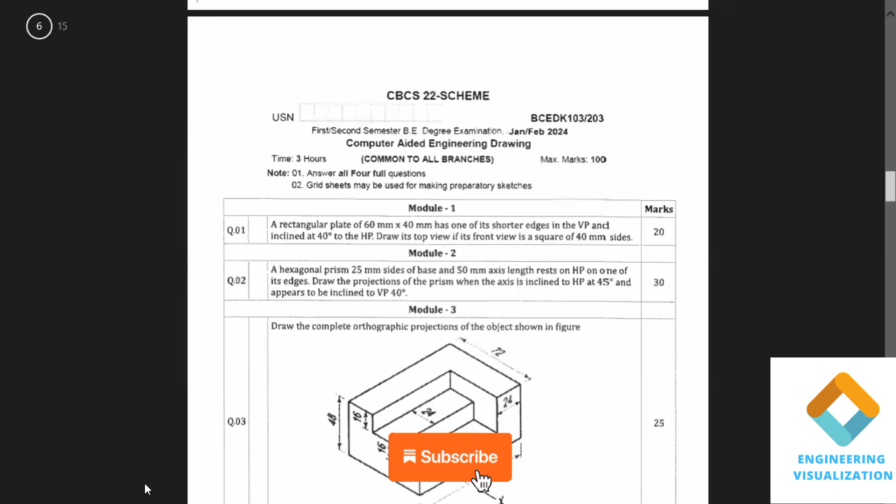Today we are going to solve model question paper 5, VTU computer aided engineering drawing. Question number 1 is rectangular lamina, question number 2 appears to be hexagonal prism, and question number 3 asks to complete the orthographic projection of this object. For this problem I have done the top, front and side views, so please go through. Problem number 4 is a cube problem, you can see this.

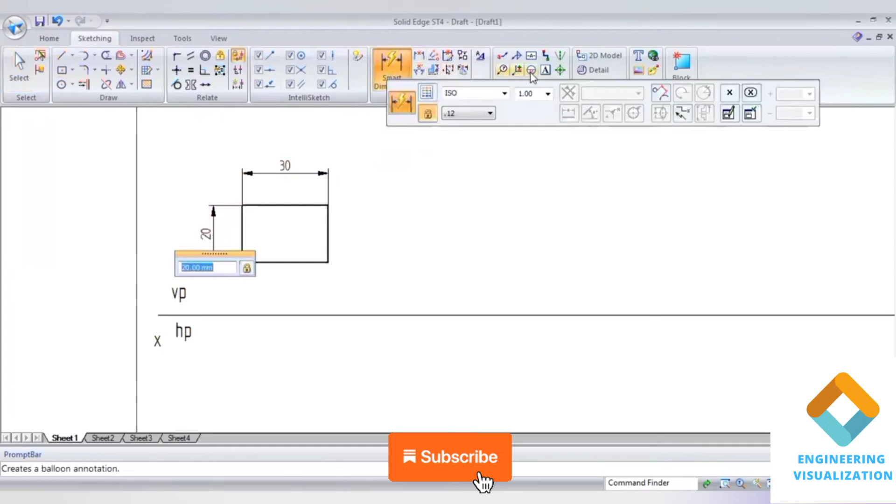Width given 30 and height 20, place it with the shorter edge here on the VP plane. Measure the dimensions, write down the notations and draw the projection lines to complete the top view.

Here B and C are not visible, that's why B and C are written within brackets.

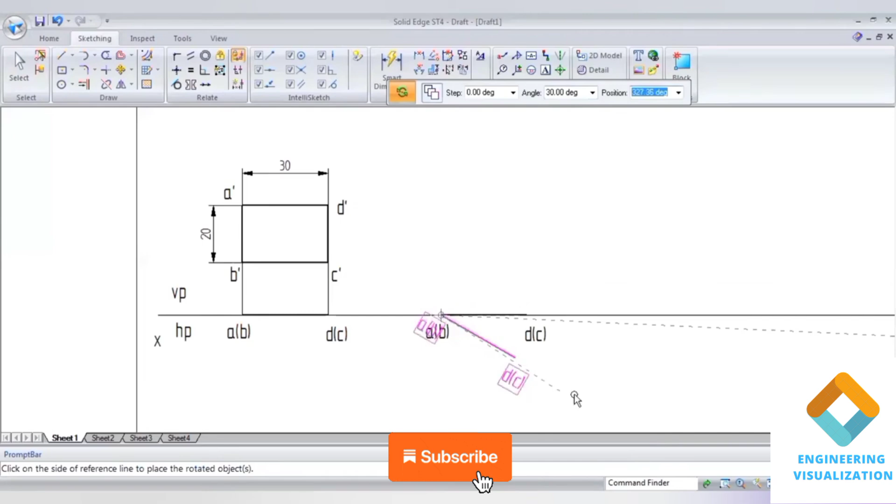Select the top view, go to move command, create a copy of it and slide along the line, and now we can give the inclinations. So inclination to the VP, here I'll give angle of inclination 30 degree. Inclination below the XY line means we have to give minus 30.

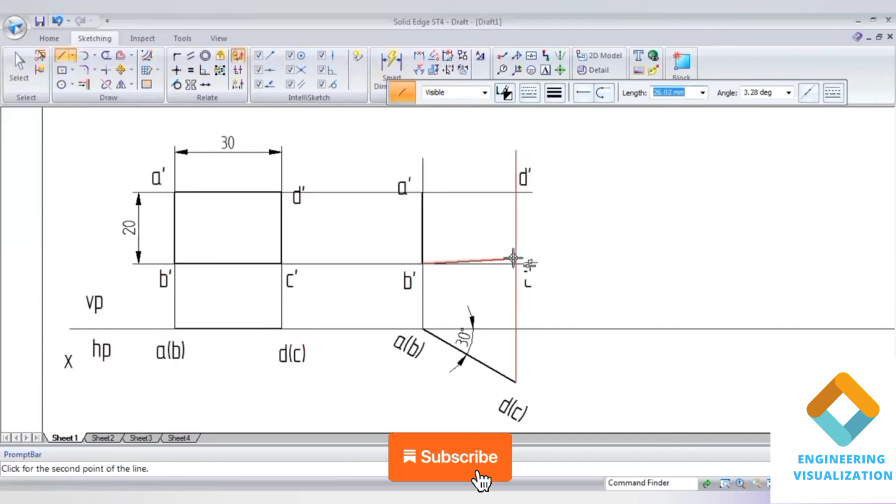Draw the projection lines to complete the second position front view, and write A dash, B dash, C dash and D dash. Go to thick line. Second position top view completed, and trim off these extra lines. You can see now the longer side of the plane is inclined at the given degree to VP, that means we should take that longer edge and give the angle of inclination here.

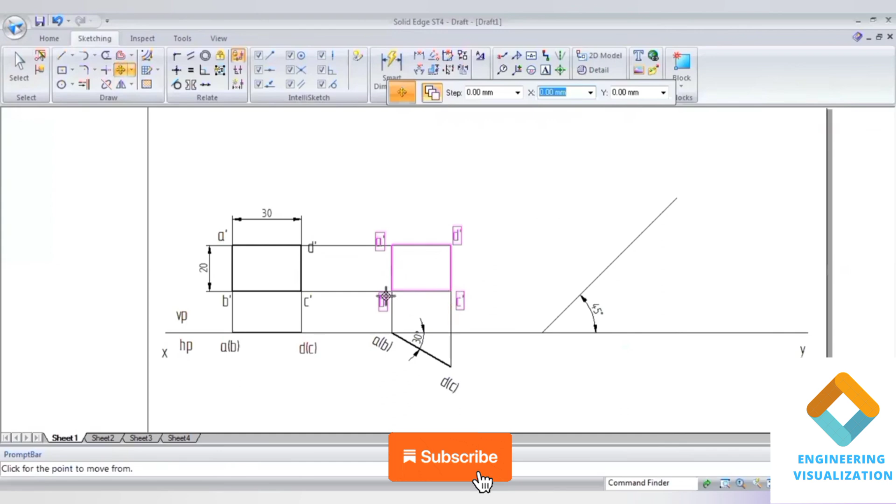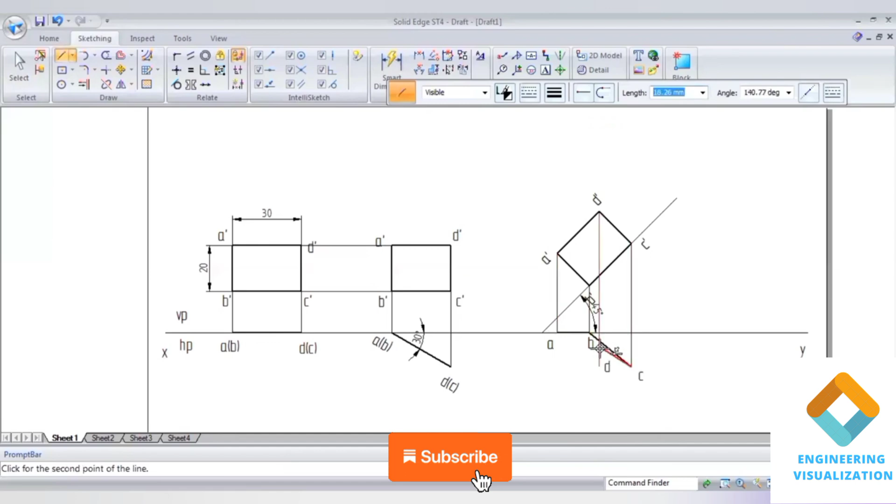First I'll draw an angle line, giving angle of inclination here 45 degree. I'll select this second position front view, create a copy of it and select the vertical edge here, B dash. Go to rotate, select this B dash to C dash and place it on the angle line. Then project downward to complete the final position, joining with the thick line. So this completes the problem.

Problem number 2, with respect to edge here: hexagon of dimension 25. Make sure this maintain relationship icon is on, then use polygon by center with 6 sides, with respect to edge. Give the naming C D E, given in bracket.

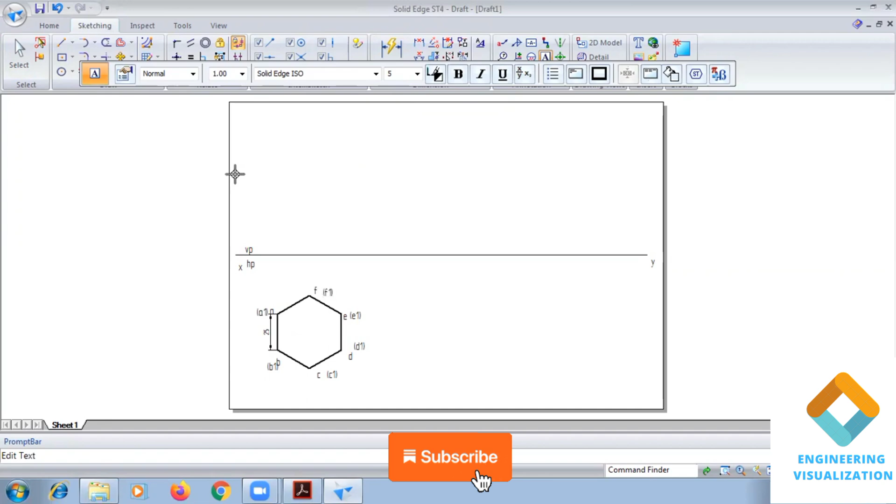After this, we draw thin lines to find out the center, that is the diagonals we are going to draw. It is O.

Now here axis length is 50, so we are able to see B dash, C dash, D dash in bracket.

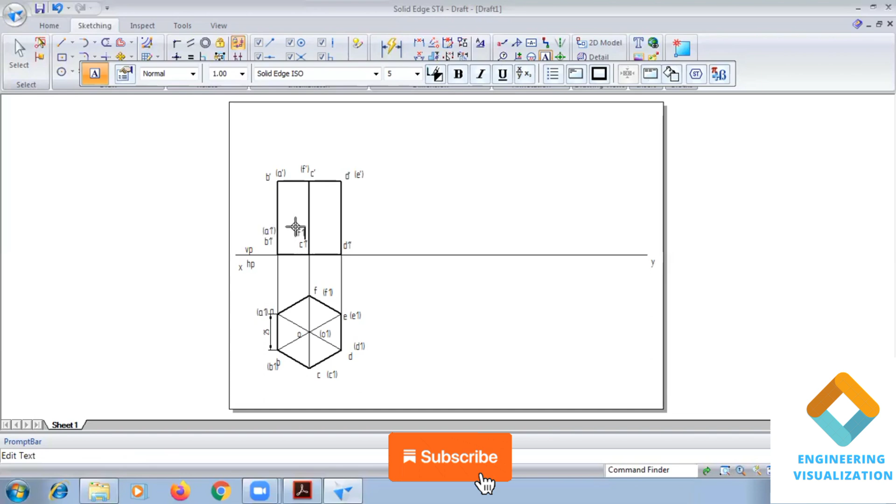Able to see O1 dash, and O dash also not visible. So now 45-degree inclination to HP.

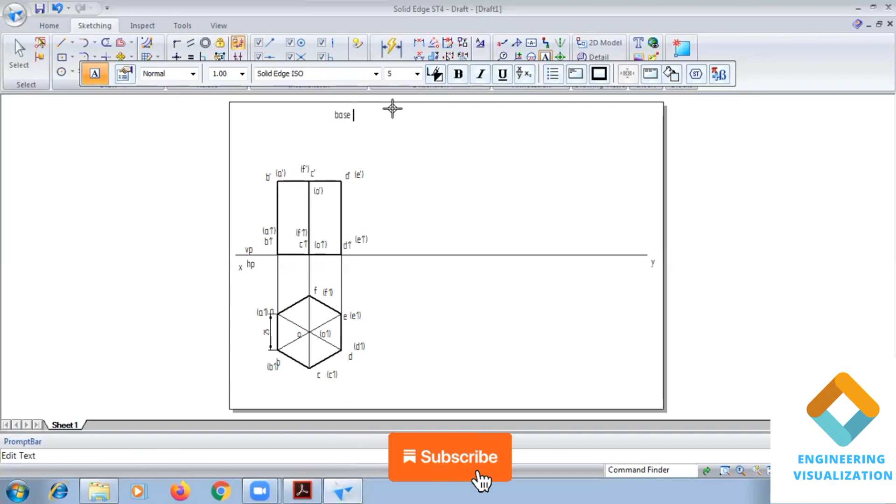So we are going for base edge inclination: 90 minus 45 equals 45. So we have to incline this with respect to the base edge, angle of 45 degree.

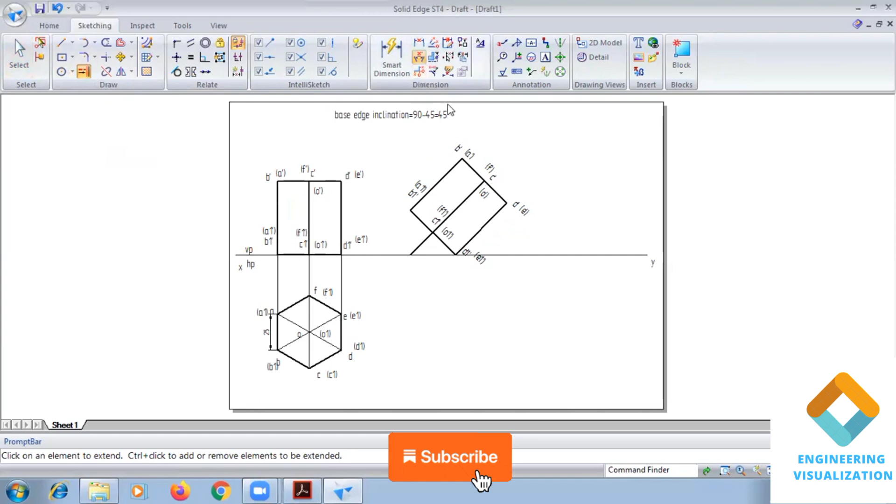Then extend command can extend the axis and find out the angle of inclination.

A1, E1, C1. So here, projection line.

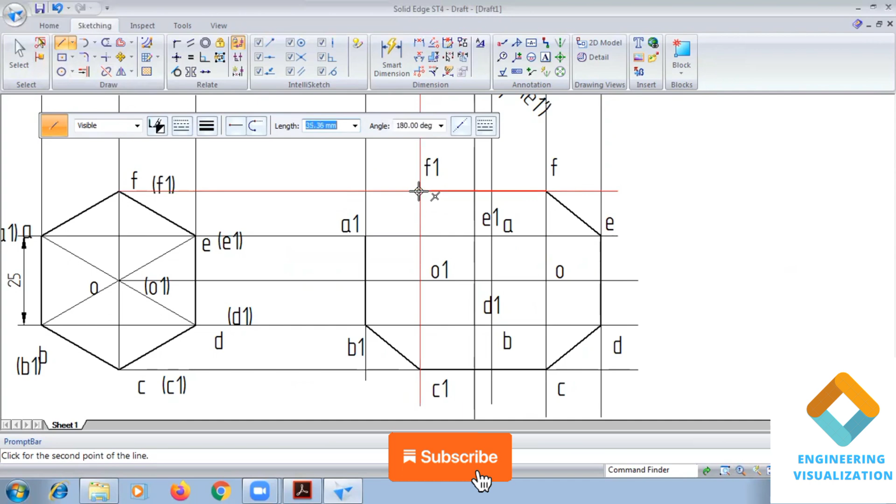This section of this is visible from here, and this rectangular face also visible. This hexagonal base is not visible from the top view, so it is written with the dashed line. Here from this slanted rectangular it's also not visible, you can show part of the line here from here to here.

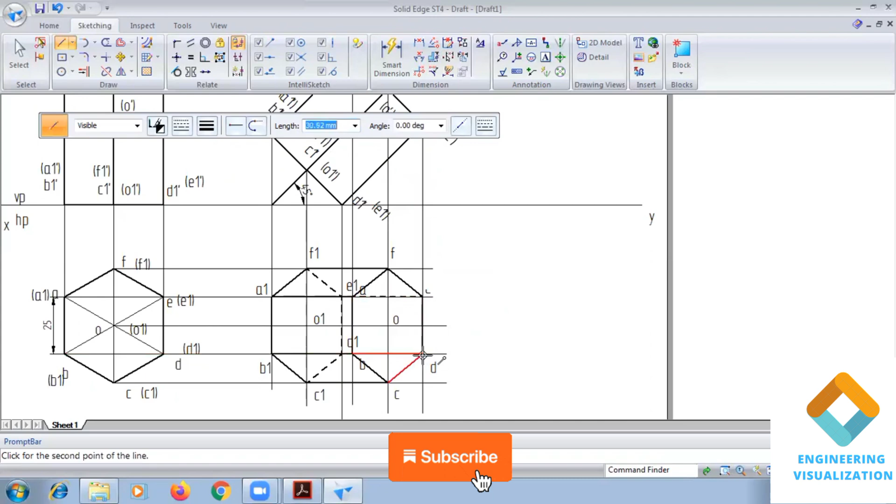Now 40-degree angle line. So angle we have to give, that is 40-degree angle, minus.

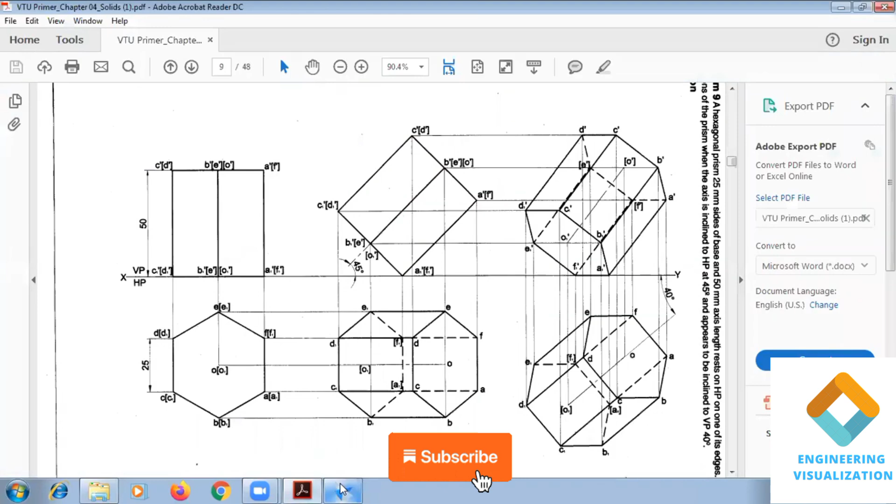You have to have here 40-degree, 40-degree, so this is 40.

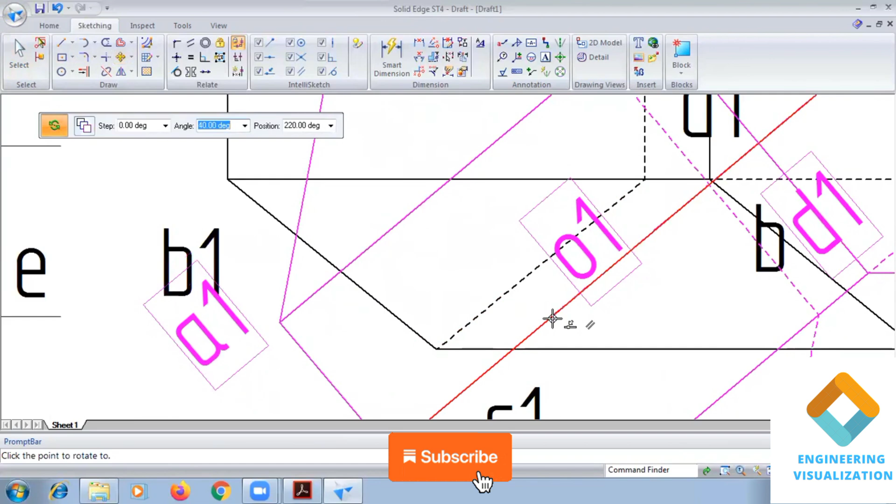Then we have to select it. Axis line here. So select this diagram to create it. So I can take it a little lower.

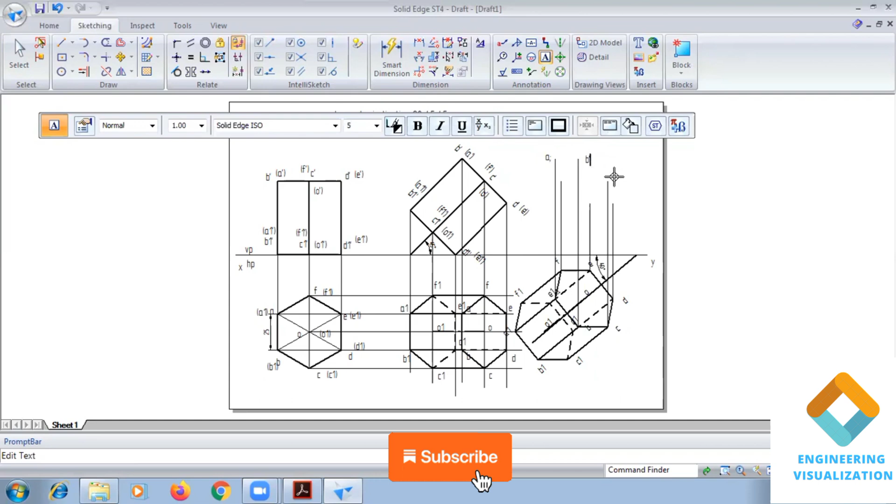Can give the naming, another projection line.

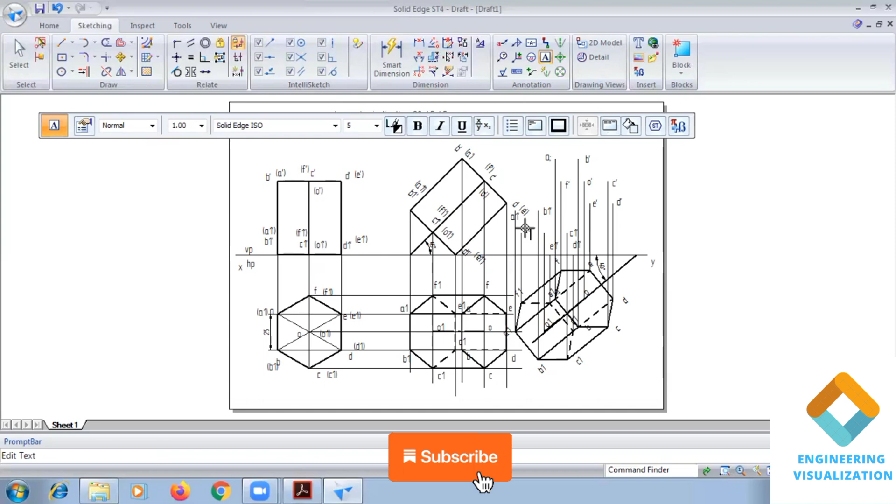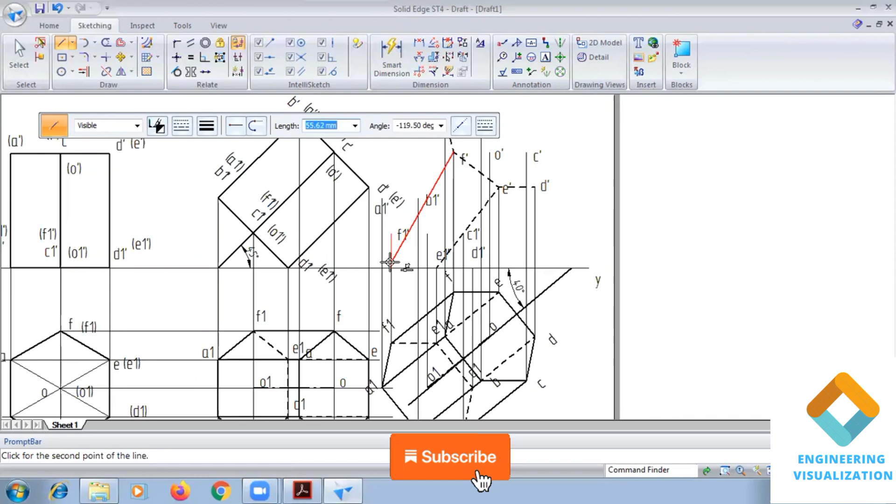Now the rest of the diagram is drawn with a continuous line, including the slant edges. Finally, the axis.

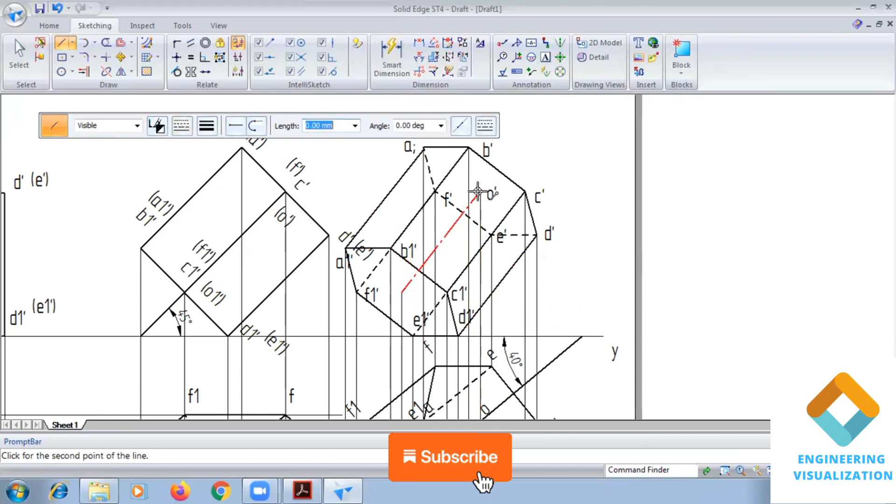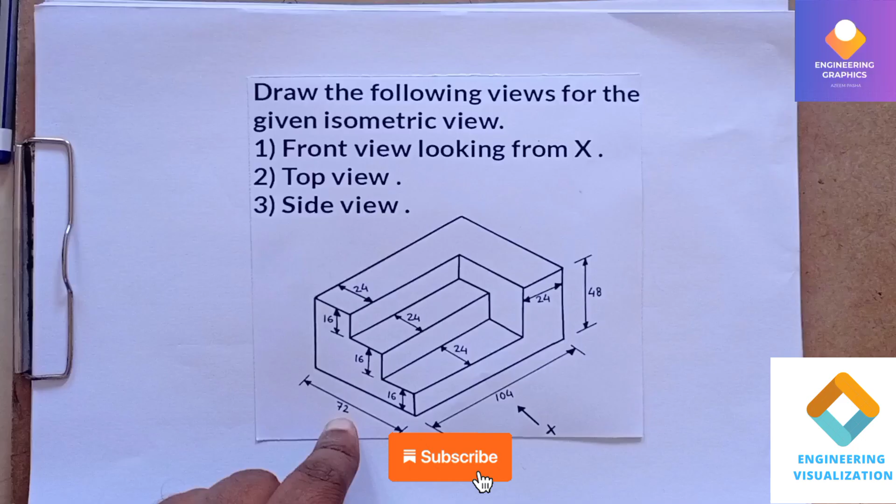So you can see in this, this is the isometric component given. We have to construct the orthographic views, that is front view, top view and side view. This is your isometric. Isometric means it is nothing but the 3D view of the component, wherein it will show the dimensions in X, Y and Z direction. But orthographic means the individual views, the top view, side view and front view, the separate views. Here we need to convert this isometric into orthographic, that's what we have to do in this problem.

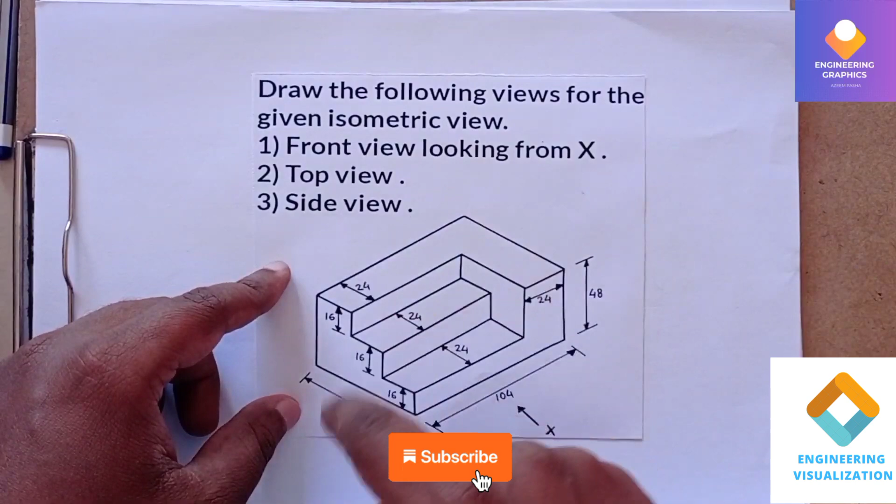You can see there is a front view exists, side view and top view exists. So we have to analyze each of these views and construct all of them. Front view looking from X means that is your front view. Then you can see there is a top view, and there is a side view. So we will be constructing each of these views one by one.

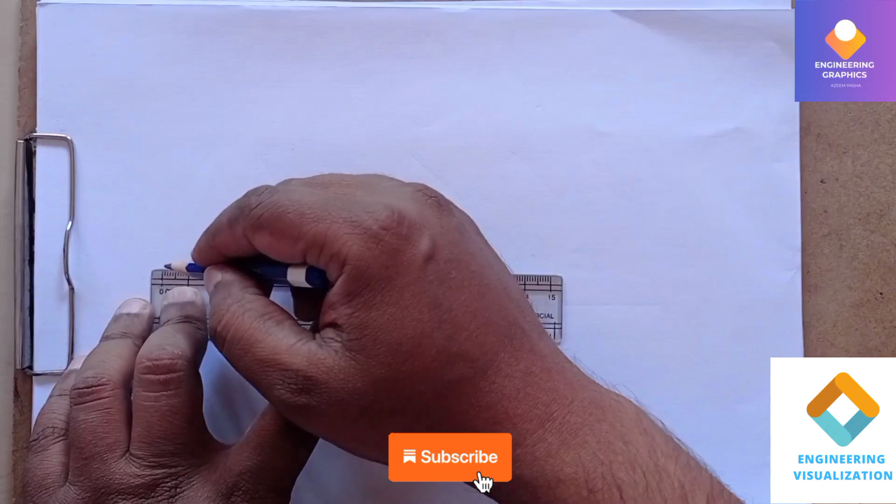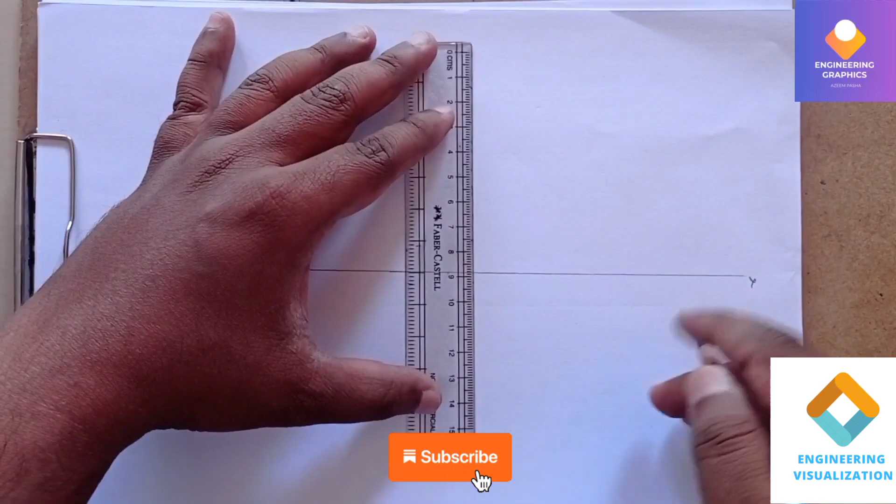First I'll be constructing the XY and X1 Y1 lines, thereby dividing the regions for top view, front view and side view. Here I'm drawing the XY line, and I'll mention XY. I'll also mention X1 Y1, that is the profile plane here.

Now we need to analyze. Here I will be constructing the front view, that's why I've written FV. Here I will construct the top view, and here the side view — that's the short notation. Otherwise I will write the full thing: front view, top view, and this is our side view.

Now we have to analyze the isometric. You can see in this isometric, this is our front view. So which are the faces visible from this front view? We need to analyze, I will write it. This is our front view, this is our top view, so we need to look at this component from the top view, that's why it is top view. And this is where we get the side view.

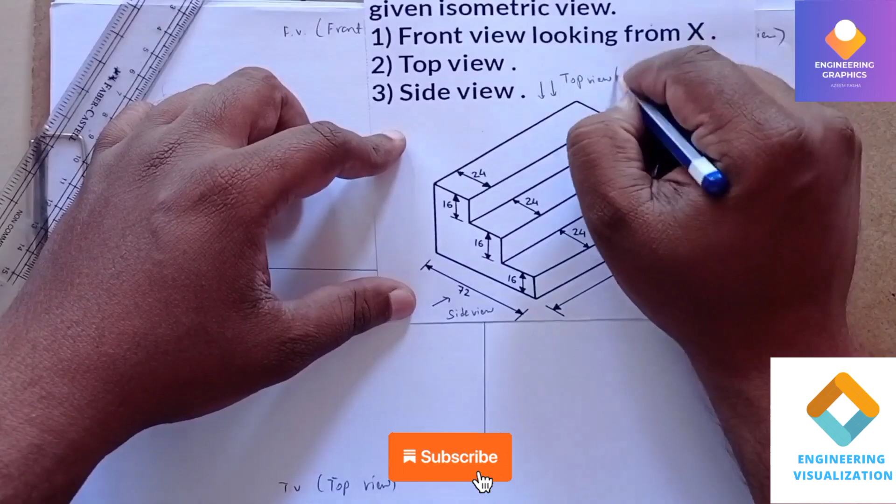You can mention the shortcut also; in the next problems I'll be mentioning the shortcut. You can analyze from the front view which faces are visible here. I'll be constructing the front view, top view and side view. The front view and side view are always adjacent to each other, and the top view and front view will be in a vertical collinear line or plane. In order to connect the top view with the side view, we draw a 45-degree angle line.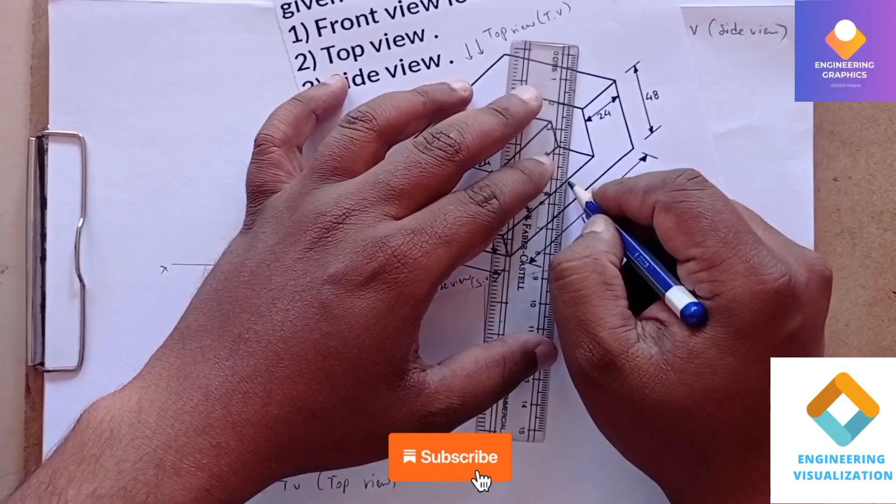Now I'll be analyzing the front view, to see which faces are visible I'm going to shade it. This is how it is easy for us to identify which faces are visible from the front view. You can see that L shape is visible from the front view, and this rectangular face is also visible from the front view, and this face also visible. So these three faces are visible from the front view.

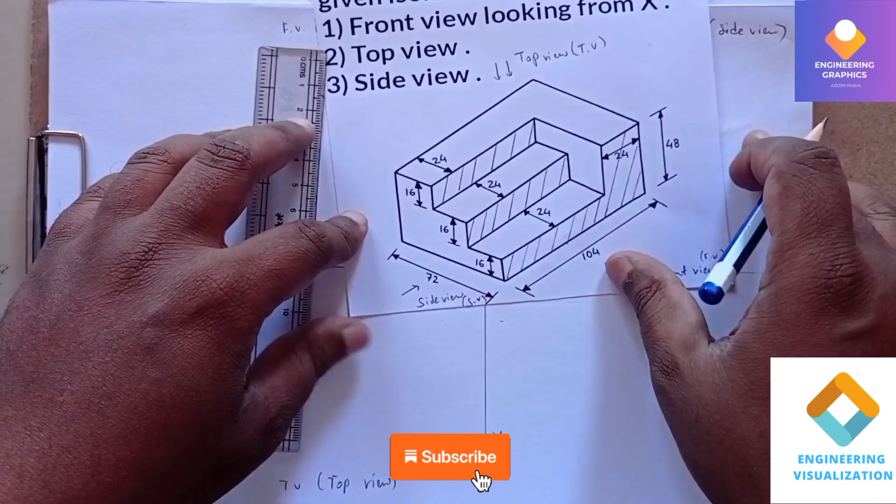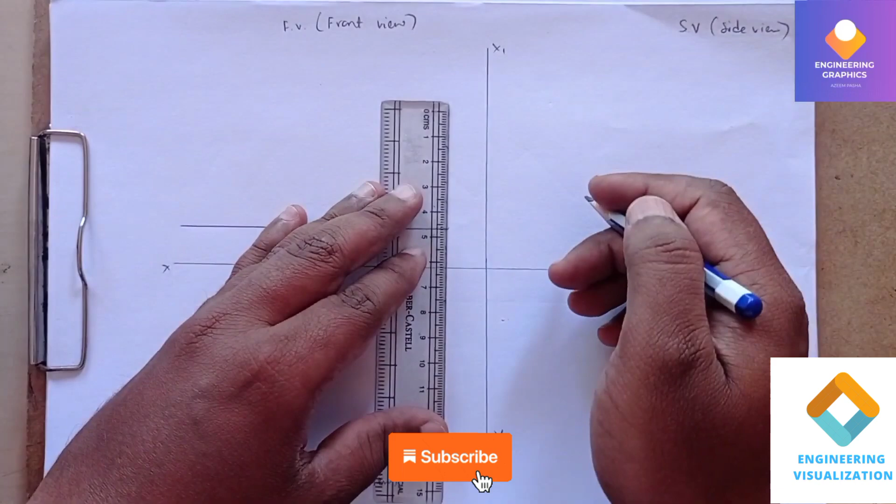We need to draw — you can see the length of it, it is having 104 mm, and the height it is having 48 mm. So that means we can construct one rectangle with 104 and 48 mm with thin lines. I'll be drawing a horizontal line here for 104 mm. You can see all these dimensions are in mm. So the height here we should get, that is 48 mm, mention 48.

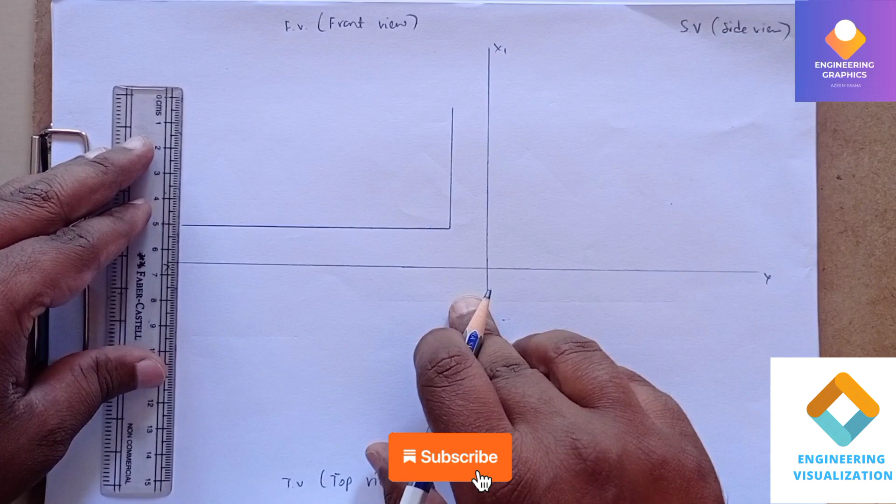And the same thing we can do — as I mentioned, we'll be constructing a rectangular face, and from there we are going to dark the things. Now you can see, analyze this front view. We need to have a dimension here, show the dimension which we have constructed for this rectangular face: dimension of 104 here, we can mention that, and this is we have 48 mm, height.

Okay, so now you analyze the diagram. In the diagram you can see the L-type shape component we should get, and it is having a height of say 16, and from there it is having a dimension of say 24. So we can mark here 24, and then 16, like that we can do.

First I will be doing 24, marking for 24 mm, and then vertically downward I will draw a line. So mark for 24, then vertically just draw a straight line, okay, and then from this end we should exactly cut it at a height of 16. So here also I will be drawing one line horizontally.

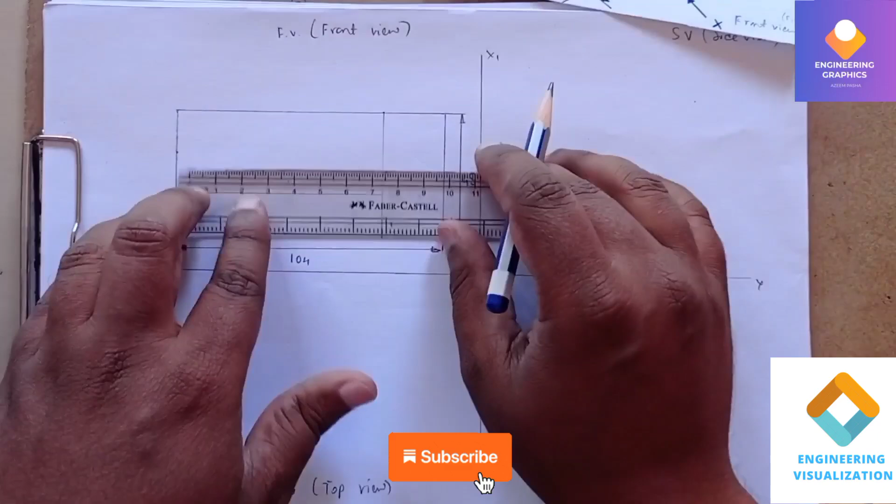And then we need to extend by 16 mm as it is mentioned. It's like steps were there exactly at 16 mm height, okay. Can construct that. So you can see here we will erase this part, it is similar to L shape, we will erase that.

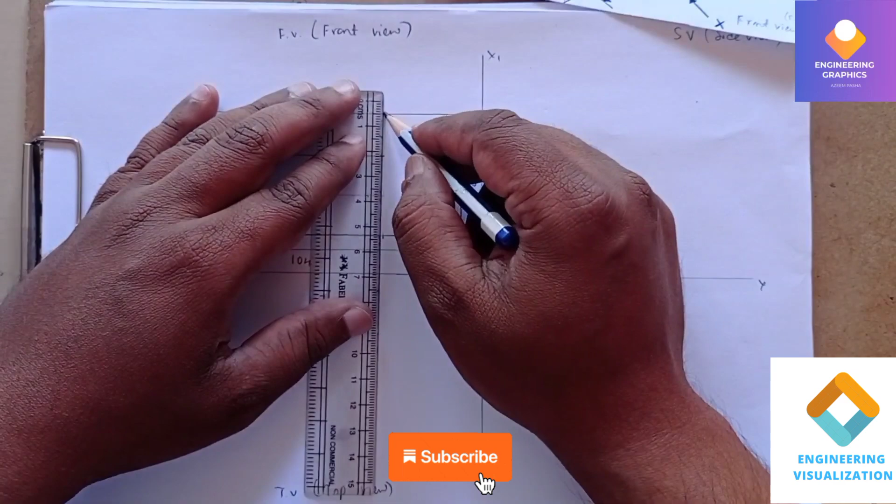Now we should dark the faces which is exactly visible from the front view, we should dark it. So these are the faces. This is how it is exactly look like in front view. So we should dark that.

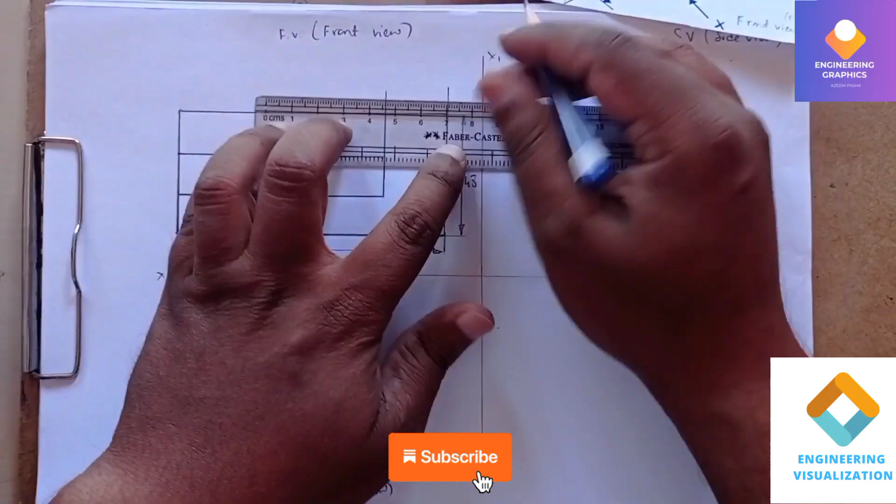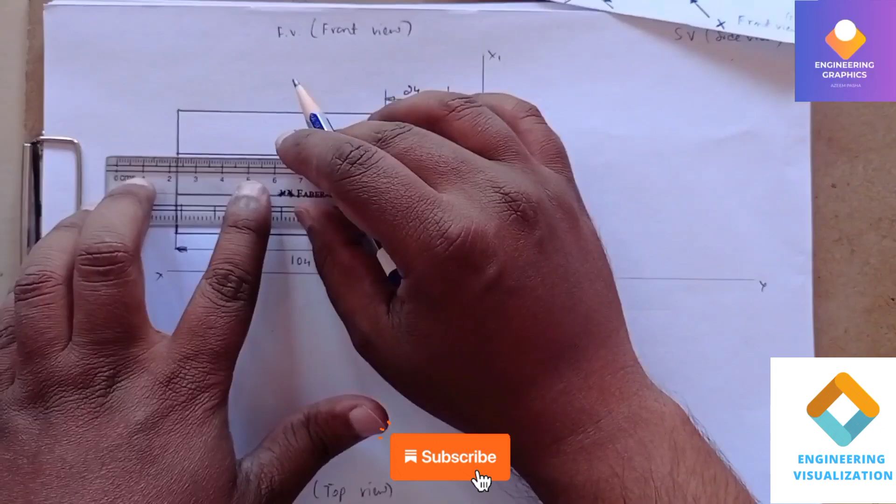Okay, now we need to construct, can show the dimensions. So it is having dimension of 24 and this is having a dimension of 16. All these three steps are having a dimension of 16. However it is there in the front view, we are showing the dimension.

So dimension of 16 we should mention. So we will draw and project the lines here. We will draw the projection lines downward to draw the top view, because we know that these things are occurring in collinear.

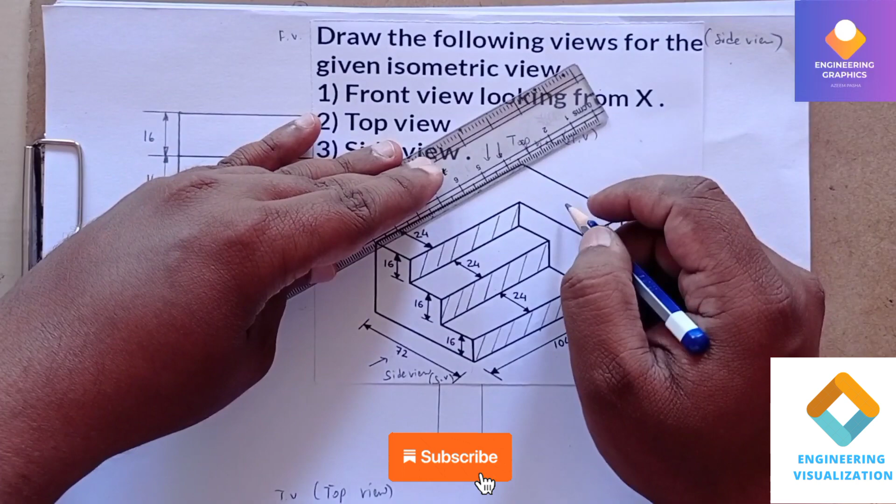Now we see the top view, so which is looking from the top. From the top view we are able to see this one, I am going to shade it with straight lines here. This face is visible from the top view. By looking from the top view we are able to see this one too, I'm just shading it with the straight line here, and this face also visible from the top view.

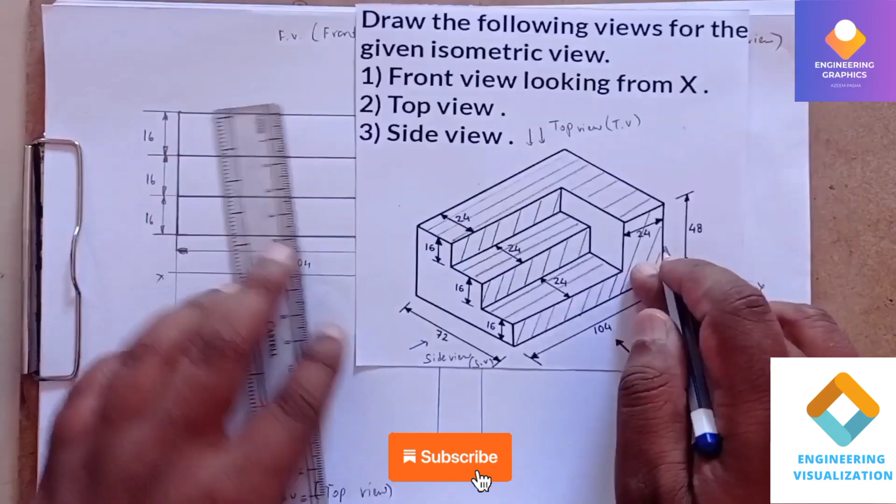Okay, this is what it is visible. You can see, so it is having a length of 104 and then it is having a width of 72. 104 by 72 we should construct a rectangle here. First I will construct that 104 and then I will take 72.

So 104 we already have it here. So you can just draw a line. Draw the lines straight so that we get the exact dimensions, make sure you draw the straight lines. So 104, draw one line and then another, the width we should have it here, that is 72.

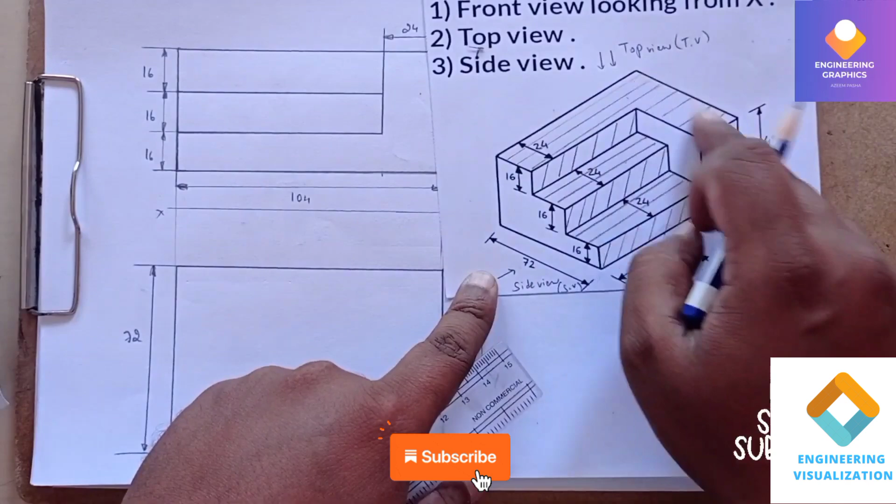Okay, you can see it is like L shape we should get. First I will construct that L shape. You can see both the sides are having a space of exactly 24, so we will mark that first. 24, exactly 24 you can mark it. Here also you can mark for 24.

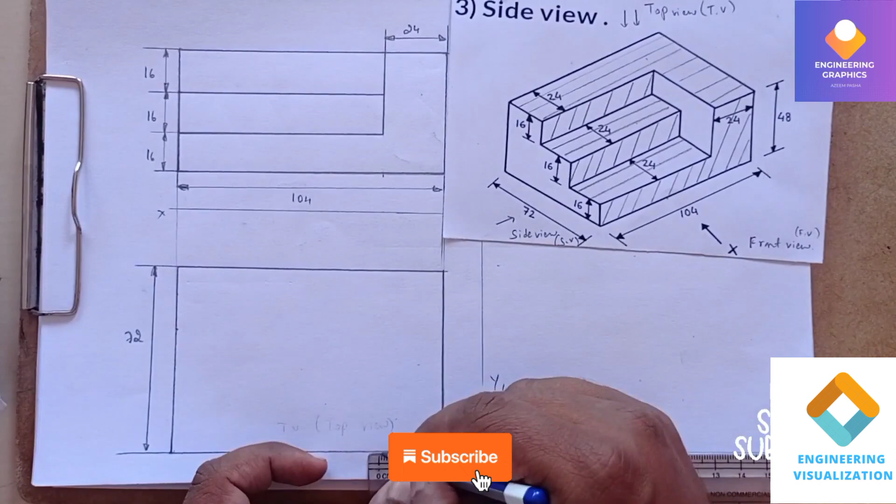Okay, then draw lines here, so where they are intersecting we get the L shape here. The L shape is done.

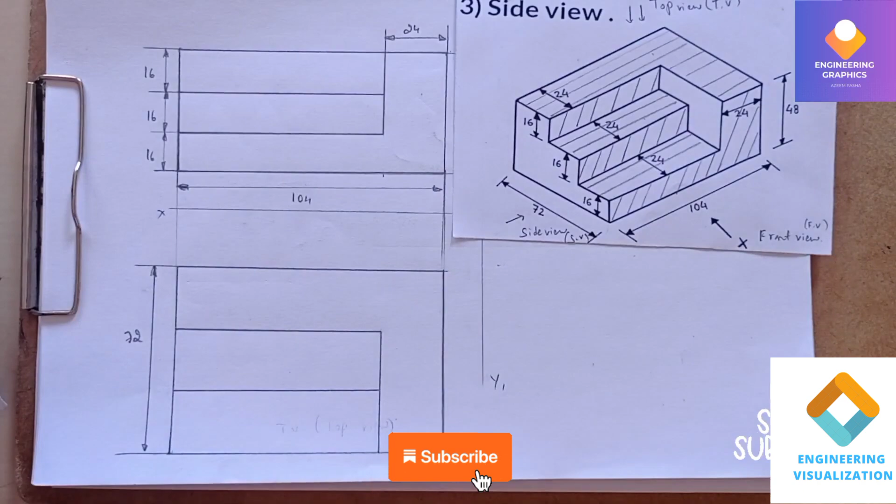Now you can see each of these rectangular faces having the dimension of again 24, so we can mention it. So it is 24. Okay, so this completes the top view, so we should dark it. Now we can mention dimensions here. So each of these top face having dimension of 24.

Now we have to draw the side view. You can see like side view we should construct. So you can see this is what I will be shading that with the help of dots, the side view. That way we will get a clear understanding of how to do that. So you can see adjacent to the front view we have the side view. I'll be drawing the projection lines here.

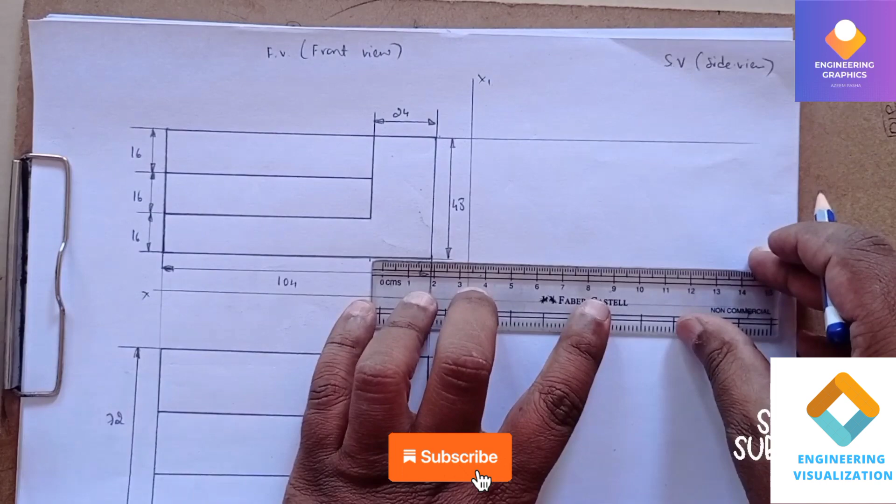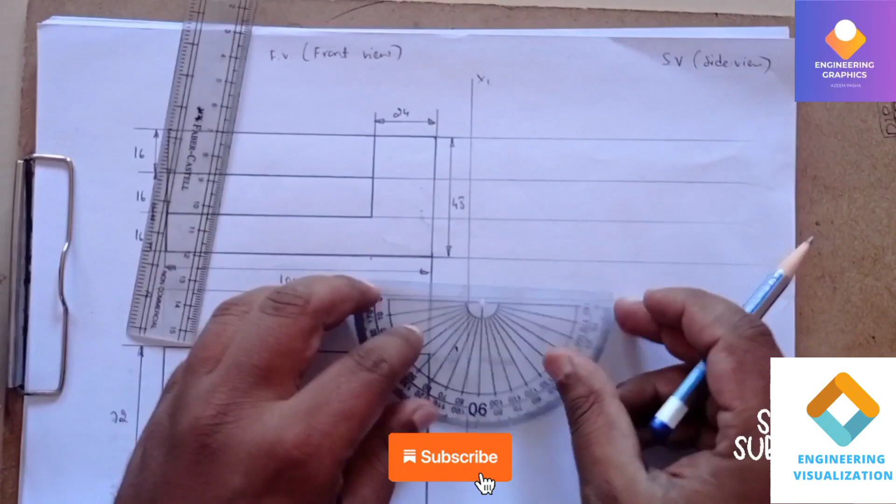In order to connect the side view with the top view, we should construct the 45-degree angle line at the intersection of XY and x1 y1. I'll place the protractor and mark the 45-degree angle, then draw an angle line passing through it, a straight line having an angle of 45 degrees.

Now project the lines from the top view till it touches the 45-degree angle line.

In this problem there is a cube given, dimension 40, resting on HP with its base on HP such that one of its vertical faces is inclined at 30 degrees to VP, so we have to draw 30 degrees. Then we place the square of dimension 40 on it. It is cut by a section plane perpendicular to VP, inclined to HP at an angle of 45 degrees, and it passes exactly at the midpoint. Since the length is 40, we take 20 as the midpoint and draw the 45-degree section plane there. Then we need to draw the development of the lower lateral surface of the cube.

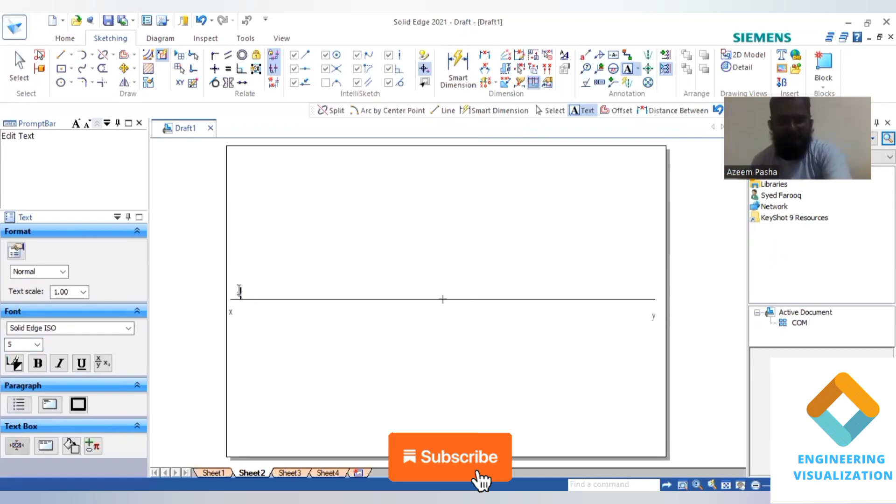First we construct an XY line. For the thickness you can take either 0.25 or 0.13, no problem. Then mark the XY line as VP and HP since it is in the first quadrant, and we use the first quadrant for the development as well.

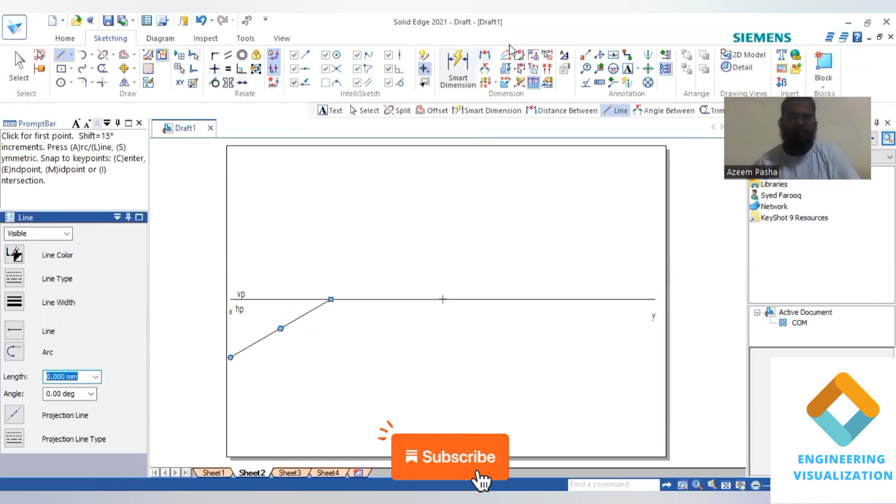Now draw an angle line for 30 degrees. Below the XY line, give an angle of minus 150, and you'll get the angle of 30 degrees here. You can measure it using the angle between command to confirm it's 30 degrees.

Now take the square of dimension 40 and place it with respect to that vertical edge. Use the rectangle by center command, giving width 40 and height 40, with an angle of 45 degrees so it's easy for us.

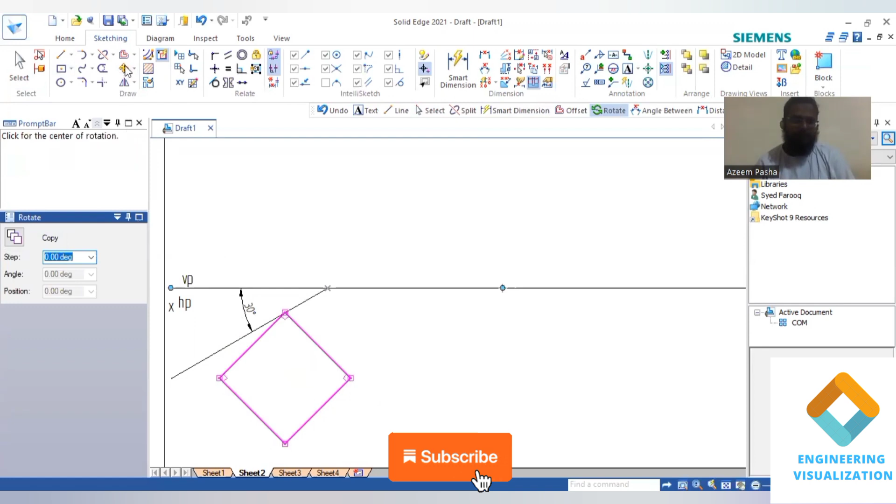When we place it on this 30-degree angle point, select it and go to move command, select the end point here, and place it on the angle line. Then go to rotate, select this whole thing again since the entire shape must be placed, select the end point from one end to another, and place it on the angle line.

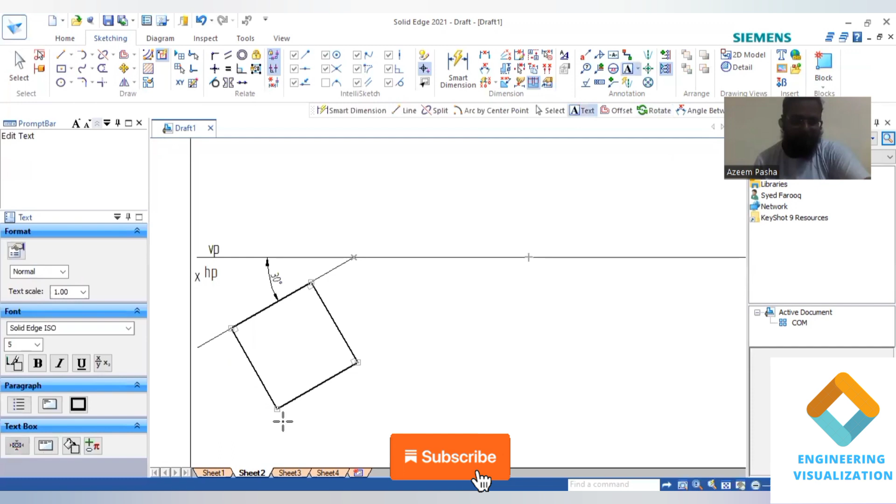Now after this, we can draw the front view, which also has a 40 mm dimension since it is a prism. We write the naming for it, A, B, C, D, only for the top face notations; we're not writing all the faces here. We show the dimension, it is 40 mm.

Now we project the line from the end points. Draw straight projection lines; you can zoom in and check it. Sometimes you're unable to do it, so you can zoom in and do it.

Now you can see the height is also 40 mm, so we construct for a height of 40. Mention it, and you need to draw exactly 40 mm here.

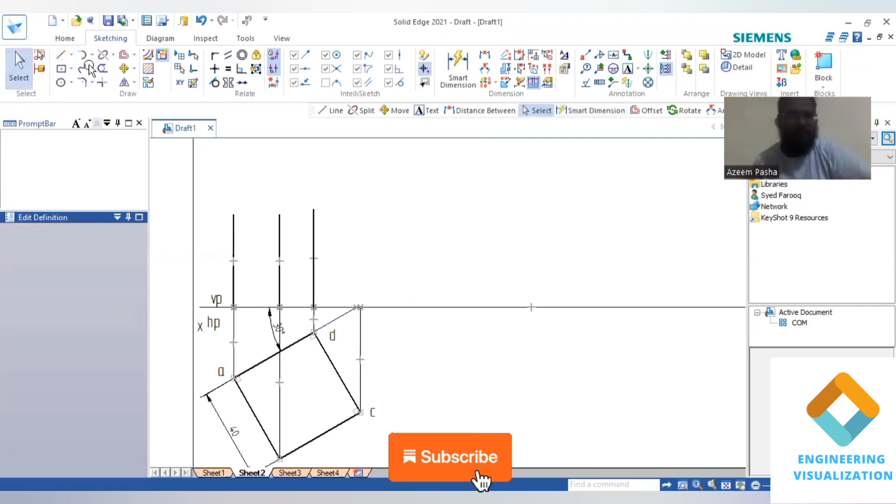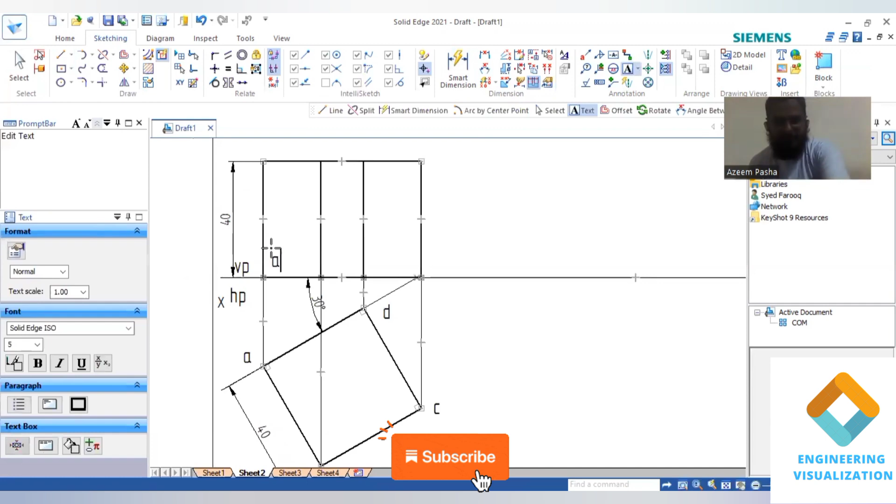Then you can join it and show the dimension. You can give the namings here, that is A, B, C, D, the vertical edges.

Now we have to draw an axis. I'll draw thin diagonal lines here to find out the center, and then draw an axis in the front view also. I draw a thin line here because it is a prism, and cube is one of the prisms, so remember, the inside lines we draw should be thin lines.

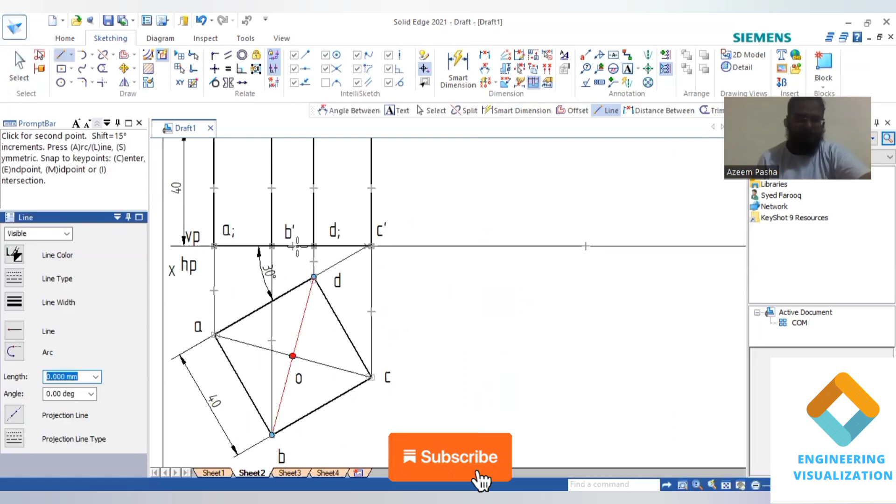You can mention it as O, and then you project it upward. Then from there you can draw an axis line here.

Now exactly at the midpoint I'll be splitting this axis line so that we'll get the midpoint of the axis, because we have to draw an angle line exactly at the middle point. So we need to split it exactly at the half here. Use the split command, click on the axis and click on the midpoint, so it will get split into two halves. You can show the dimension for the lower part, so it will be exactly 20 mm.

Now you take a line, section plane, we have to draw an angle line for an angle of 45 degrees here. You can give the angle 45 degrees, enter, then you just draw a straight line. So we need to draw an angle line.

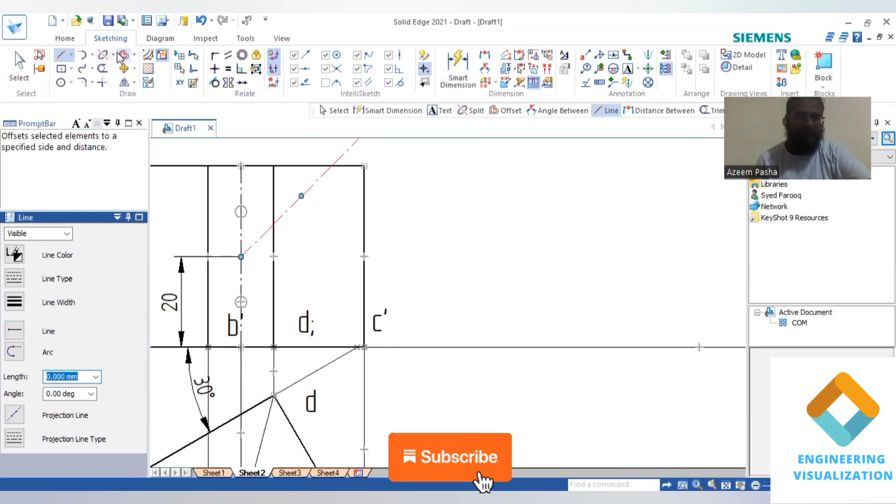Now using extend to next command, we can extend the same section plane downward also. So it is extended. Now you can show the angle. You can see that we have done it.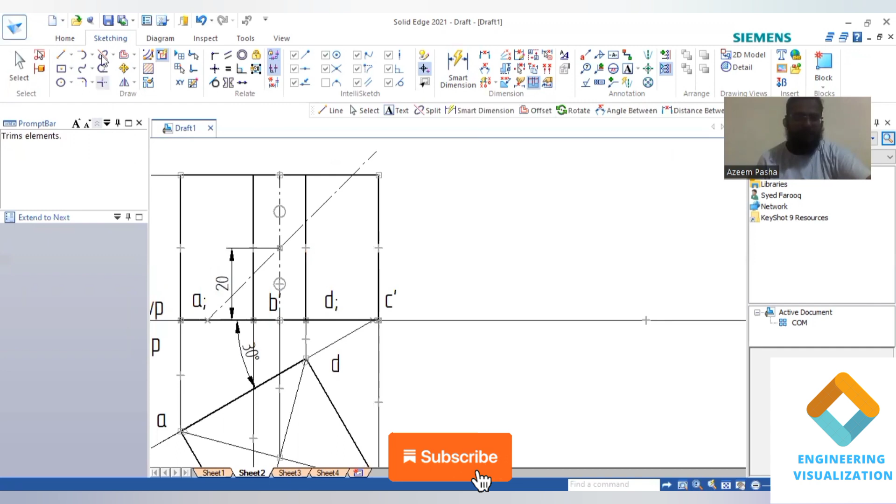Now I'll be darkening the retained cut portion. Remaining cut portion we should make it dark. The upper part of it I'll be making it thin. You can see wherever the section plane has been cut, from there I'll be drawing a projection line downward.

Wherever the section plane we are having it, we are not going to draw. Where we don't have the vertical line projecting downward, in those cases I am drawing a straight line here, vertically downward. Now the upper cut part will make it a thin line.

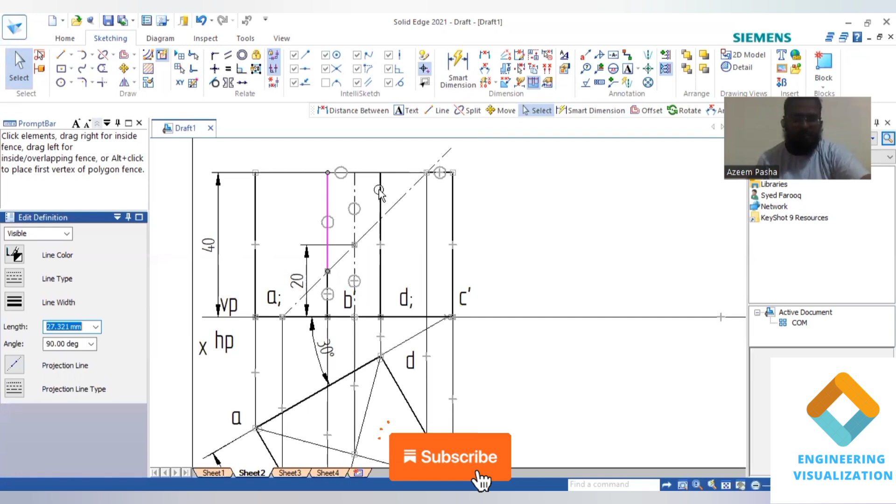Lower part we should make it a thick line. You can again split if it is not split properly, and make that upper part, because we need to draw the development of the lower portion, so we should make sure that the lower part should be in dark.

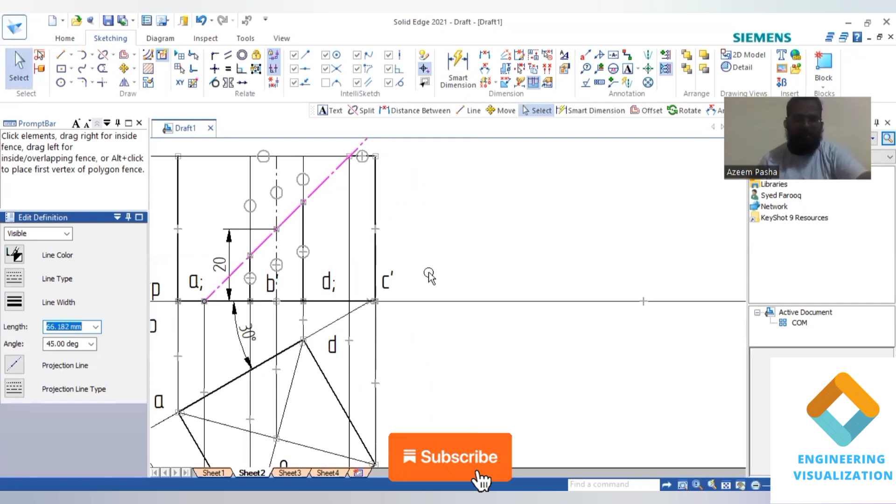Now you can give the numbers where we have cut the section plane. This is where cutting actually started, so I'll mention this as 1, and it is occurring between the vertical edges A and B, so this is 1, and I'll mention this as 2, so point number 2 is occurring exactly at edge B, and then point number 3 is between B and C.

If we have drawn a straight line projecting downward, you can see point number 3 we are getting in between B and C. And that is our point number 5, so you can mention it. So this is 3, and this is 4, and this is 5. So 5 we are getting exactly on the vertical edge D here.

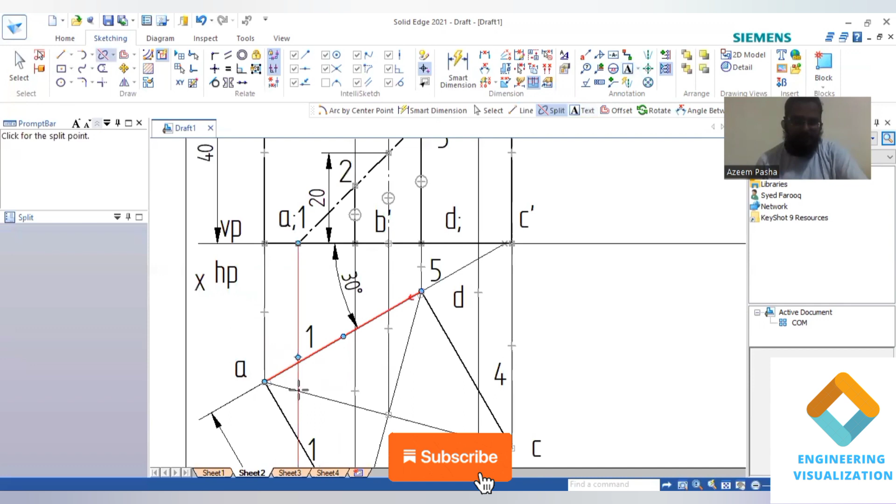Now we have to draw the development of this. You can see this, and this is exactly 1. Now in this top view I am going to measure this length. Before that I am going to split it to the exact length, so that we can measure it, and the same length we can cut it in the development part.

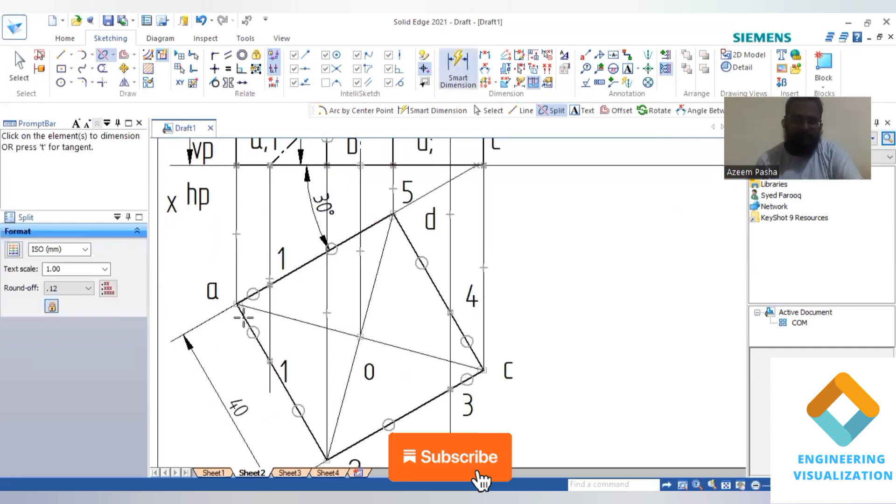Using smart dimensions you can measure the dimension of it. Measure exactly the length which we have cut. You can see in both cases we are getting exactly 8.45 and 14.64.

Now we draw the development of this. We'll be drawing a parallel line, a thin line here, a straight line. We'll draw a vertical line here.

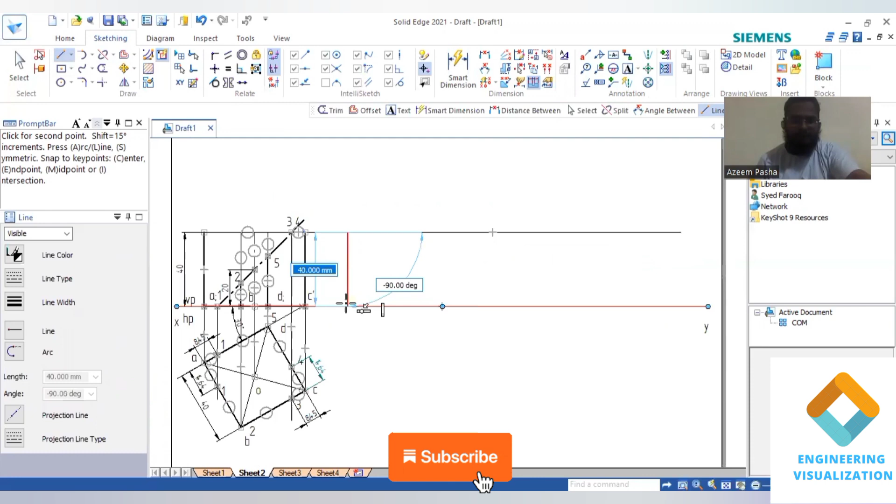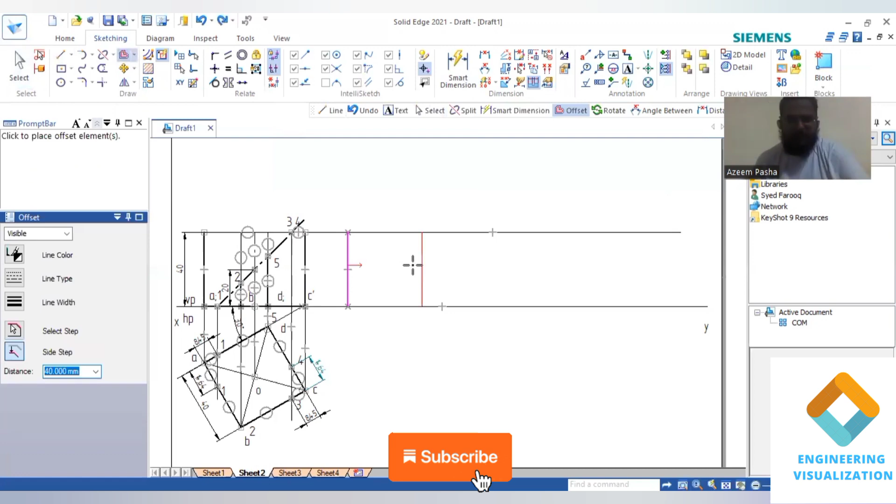Now using the offset command, I'll be taking 4 faces here at a distance of 40. From that vertical edge I'll be considering a distance of 40, enter. So the wrong side I have considered, you need to consider on the right side. 40, enter, click OK, and then you get the 4 faces here.

Now we can mention the naming for it: capital A, capital B, capital C, capital D, and capital A. Now we need to mention wherever we cut the section plane with the number, from A to 1 on the line AB, it is 14.64. So I'll be taking an arc by center point from point A, measuring the length of 14.64 and cutting the arc. So cutting the arc, this is your point number 1.

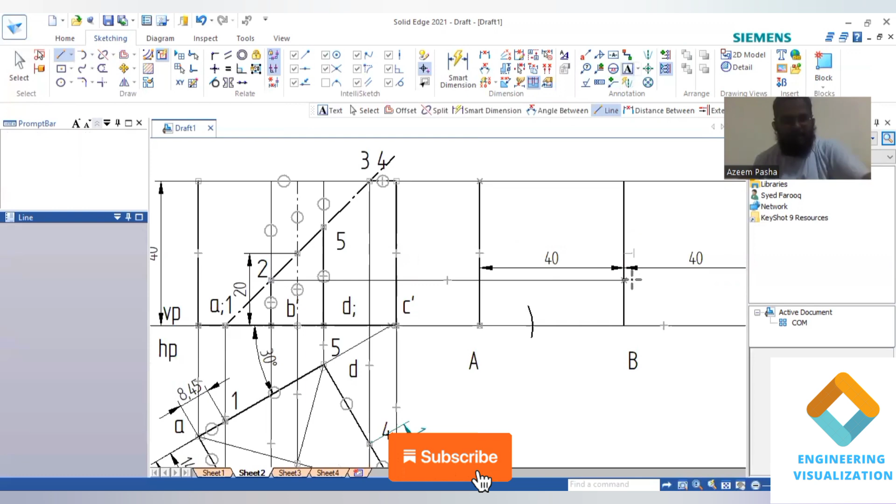Now we can see point number 2, we're getting exactly on the vertical edge B here. So for that I'll be drawing a horizontal line, till here B. So this is point number 2. And now for point C,